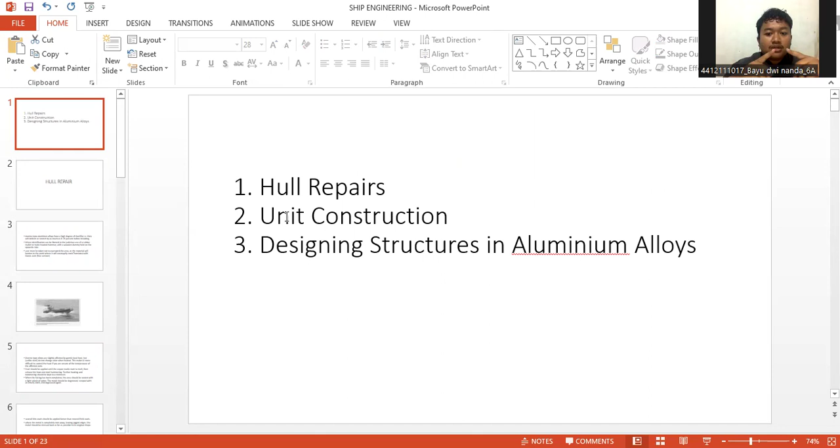Hull repairs, unit construction, designing structures in aluminum alloys. Number 2, hull repair. Marine type aluminum alloys have a high degree of ductility. They will deform or stretch by as much as 8 to 50% before breaking. Minor indentation can be likened to the judicious use of a rubber mallet or wood-headed hammer with a wooden dummy held on the opposite side.

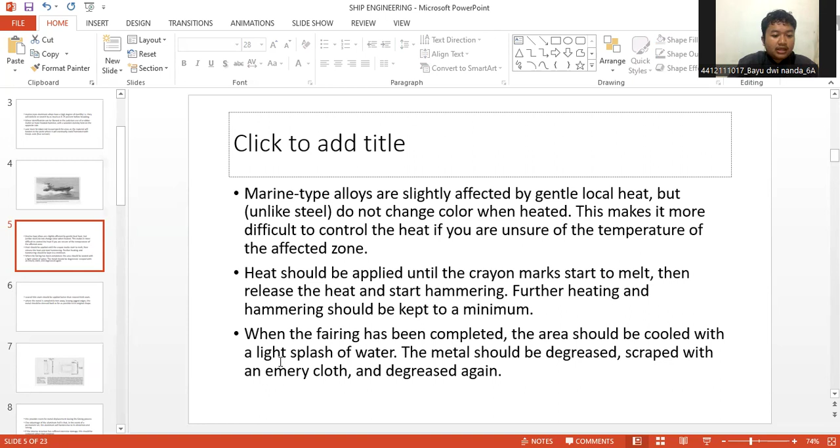Heat should be applied until the crayon marks start to melt, then release the heat and start hammering. Further heating and hammering should be kept to a minimum. When the fairing has been completed, the area should be cooled with a light splash of water. The metal should be degreased, scraped with an emery cloth, and degreased again. Several thin coats should be applied rather than several thick coats. Where the metal is completely torn away, leaving jagged edges, the metal should be dressed back as far as possible to its original shape.

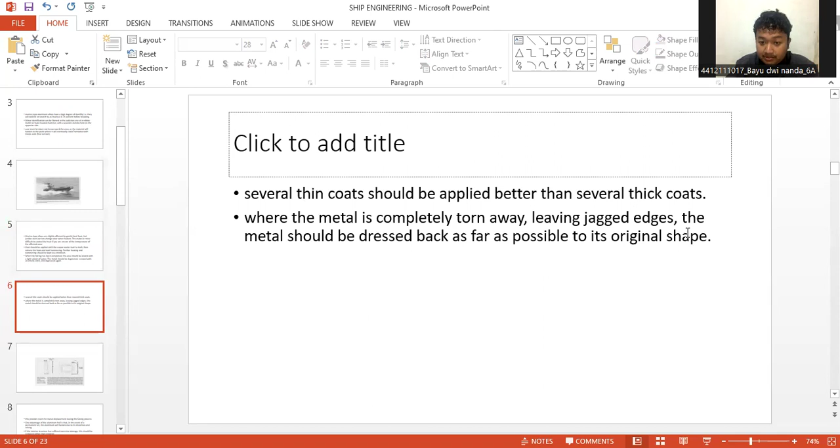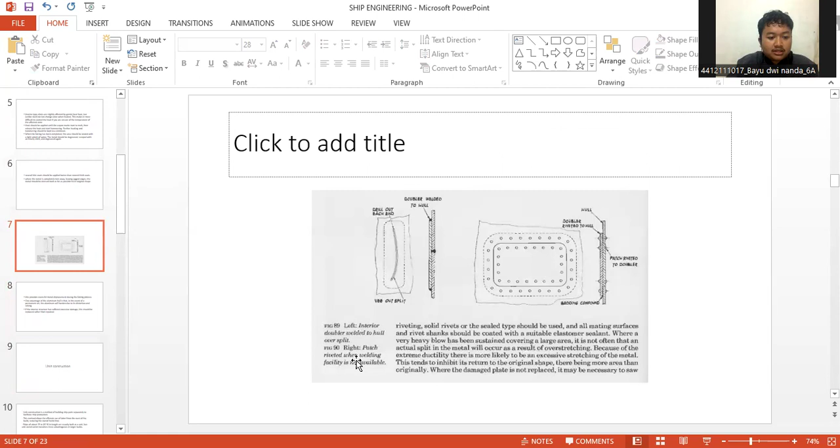The example of aluminum: left, interior doubler welded to hull over split. This provides room for metal displacement during the fairing process. One advantage of the aluminum hull is that in the event of a permanent set, the aluminum will harden due to its distortion and raising. If the interior structure has suffered excessive damage, it should be replaced rather than repaired.

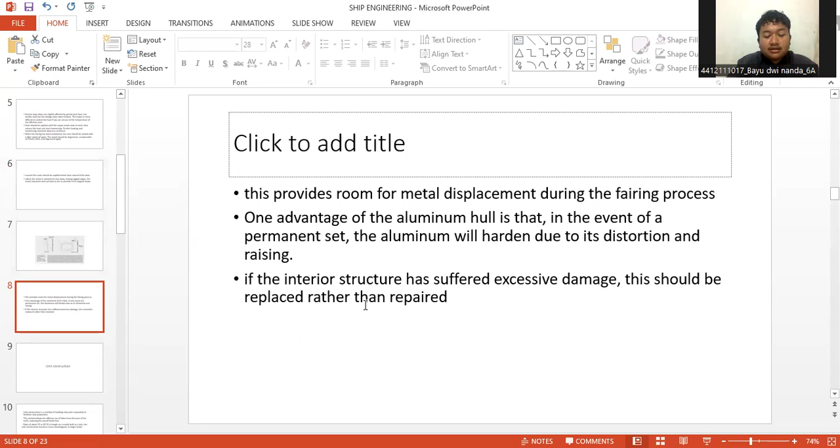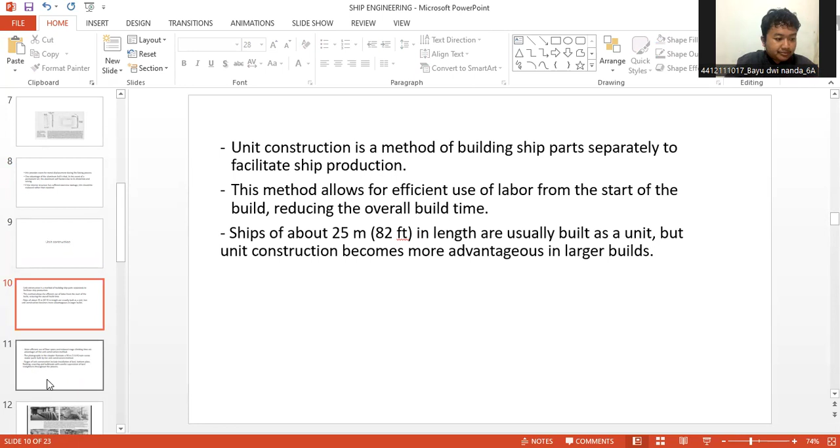Unit construction. Unit construction is a method of building ship parts separately to facilitate ship production. This method allows for efficient use of labor from the start of the build, reducing the overall build time. Ships of about 25 meters, 82 feet in length are usually built as a unit, but unit construction becomes more advantageous in larger builds. More efficient use of floor space and reduced stage climbing time are advantages of the unit construction method.

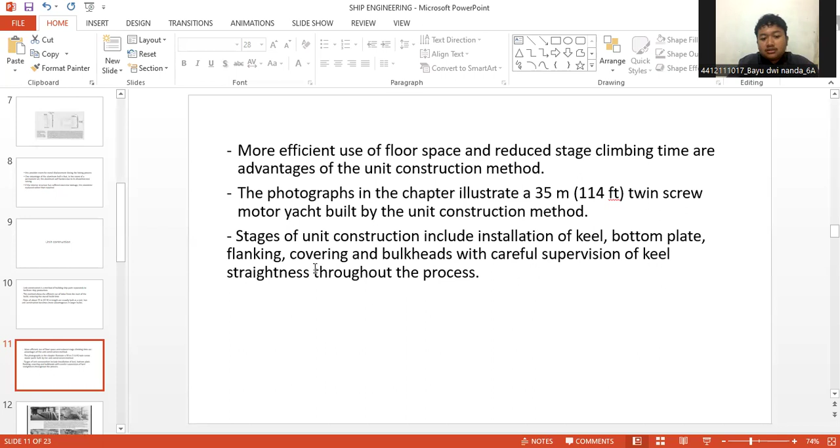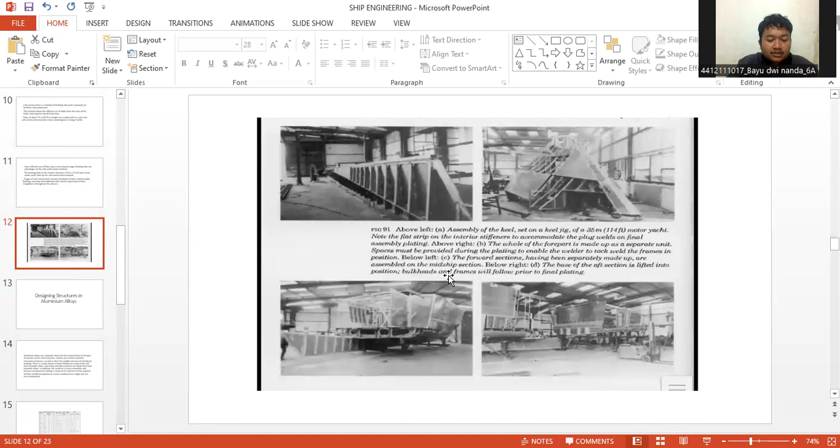Next material: designing structures in aluminum alloys. Aluminum alloys are a popular choice for the construction of all types of marine vessels and structures, mainly due to their excellent corrosion resistance, as well as their low weight and ease of joining by welding. There is a wide choice of plate thicknesses made from non-heat treatable alloys, and many extruded sections are made from heat treatable alloys. In addition, this material is easy to machine, and because no expensive tooling is required, in contrast to that required by fiber-reinforced polymers, vessels produced in a single unit are cost competitive.

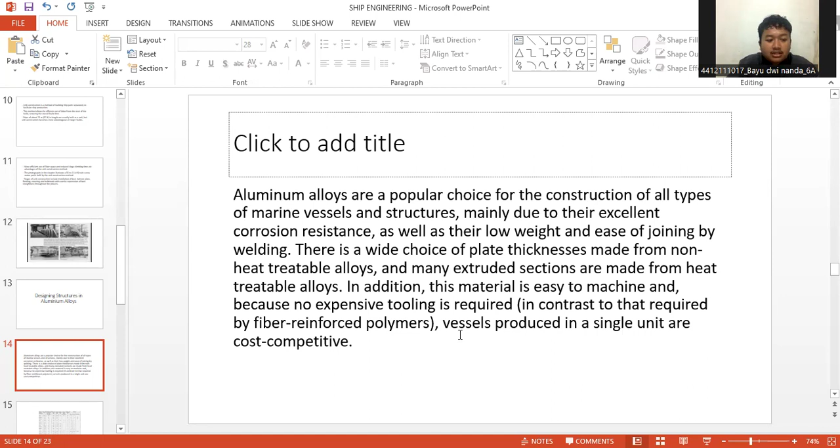Example, material designated by alloy and temper. Lowest possible cost. None of this can be achieved by guessing the size and quantity of material. There are two approaches that can be used to derive scantlings. The first is to use empirical data established by classification societies such as Lloyd's Register of Shipping, Det Norske Veritas, American Bureau of Shipping, and Bureau Veritas. The rules in these classification societies provide the main scantlings on aluminum alloy vessels based on years of experience.

However, it must be remembered that these rules are based on empirical data, so that if optimum weights are to be obtained, a first principles calculation approach must be used. All classification societies will accept such an approach by submitting relevant calculations and drawings. Example of construction of aluminum alloys with steel and FRP: a 41 meter, 134 feet monohull fast passenger vessel.

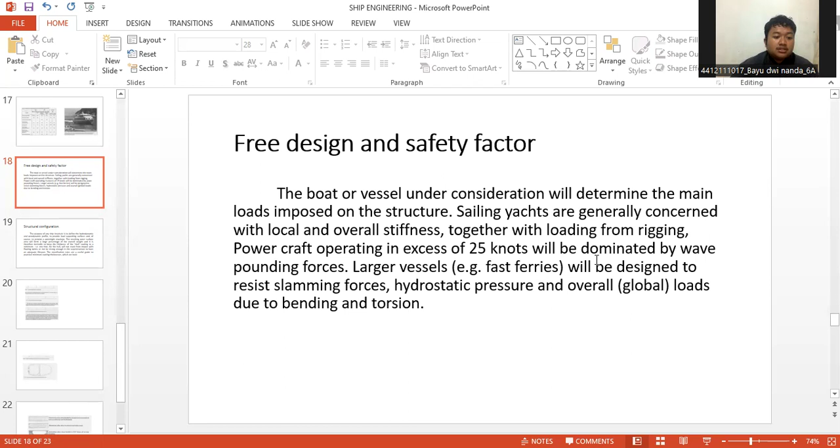Pre-design and safety factor. The boat or vessel under consideration will determine the main loads imposed on the structure. Sailing yachts are generally concerned with local and overall stiffness, together with loading from rigging. Powercraft operating in excess of 25 knots will be dominated by wave pounding forces. Larger vessels, fast ferries, will be designed to resist slamming forces, hydrostatic pressure, and overall global loads due to bending and torsion.

Structural configuration. The purpose of any ship structure is to define the hydrodynamic and aerodynamic profile, to provide load supporting surfaces and of course to provide a watertight envelope. The resulting outer surface area will form a large percentage of the overall weight, and it is therefore desirable to keep the thickness of the shell plating to a minimum, so that the hull will not crack from impact with floating debris or not be strong enough in the superstructure to have an adequate lifespan. The classification rules are a useful guide to practical minimum plating thicknesses.